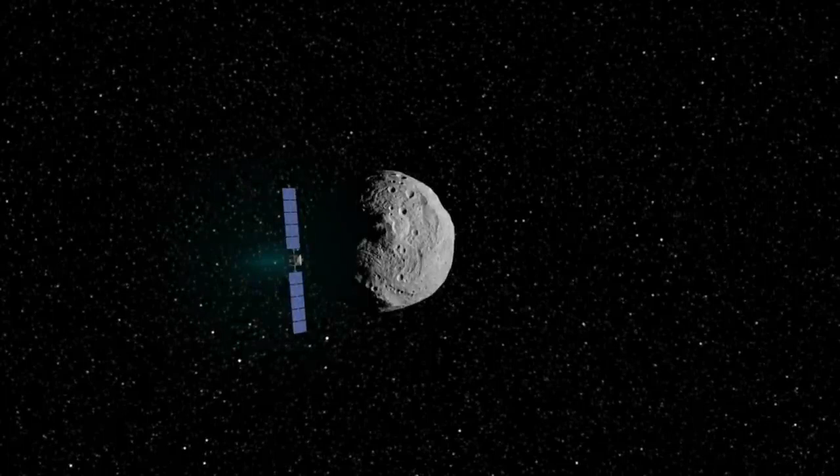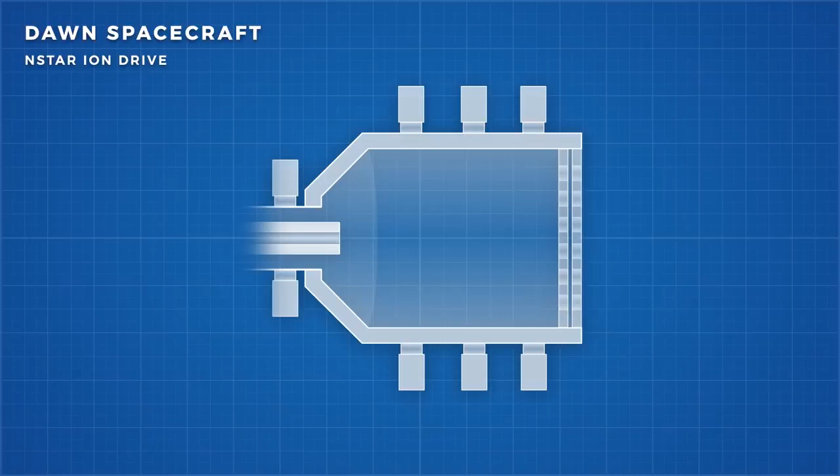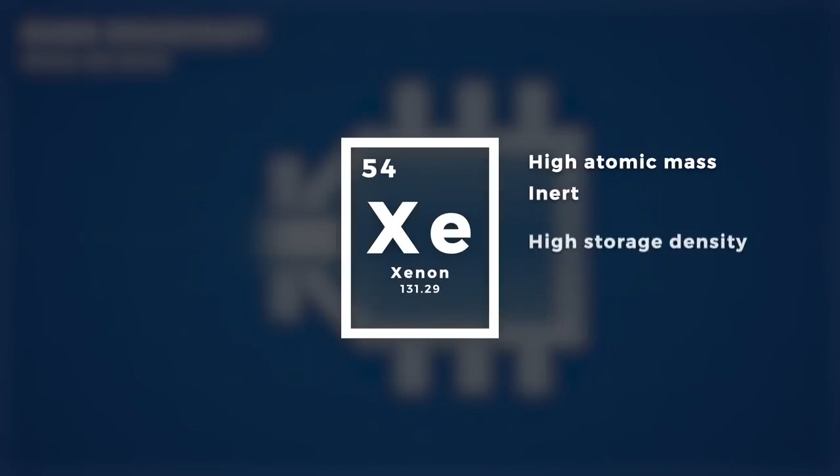This technology has been in development for decades now, with many spacecraft already using variations on the idea to achieve highly efficient thrust systems. These engines work on a similar principle to the ion propulsion of the MIT plane, albeit in a very different environment that lends itself to the technology. Take the NSTAR ion drive aboard the now retired Dawn spacecraft. This spacecraft used xenon as a propellant because it has a high atomic mass, allowing it to provide more kick per atom, while being inert and having a high storage density, lending itself to long-term storage on a spacecraft.

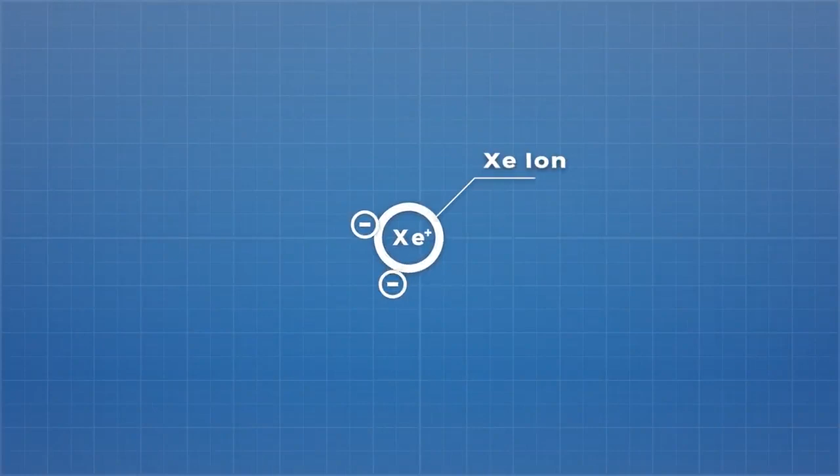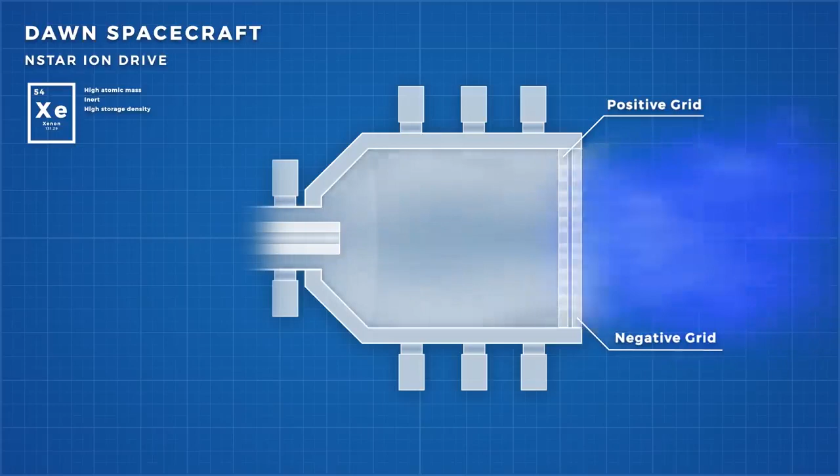The engine releases both xenon atoms and high-energy electrons into the ionization chamber, where they collide to produce a positive xenon atom and more electrons. These electrons are then collected by the positively charged chamber walls, while the positive xenon atoms migrate towards the chamber exit, which contains two grids, a positive grid called the screen grid and a negative grid called the accelerator grid. The high electrical potential between these grids causes the positive ions to accelerate and shoot out of the engine at speeds of up to 145,000 kilometers per hour.

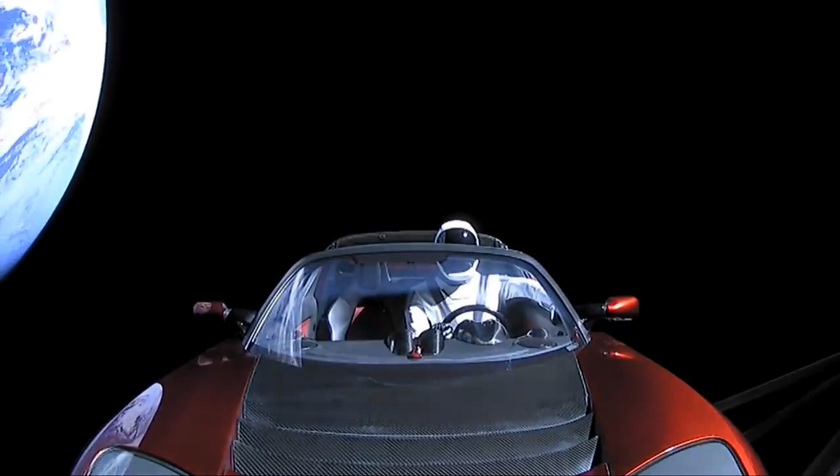At that speed, even the tiny xenon atoms can provide a decent bit of thrust, but even still, this engine provides a maximum of 92 millinewtons of force, about the same force a piece of paper will exert while resting on your hand. But in the vacuum of space, there is no air to sap away the precious energy we provide. With no drag or friction to remove energy, we gradually build our kinetic energy and gain speed.

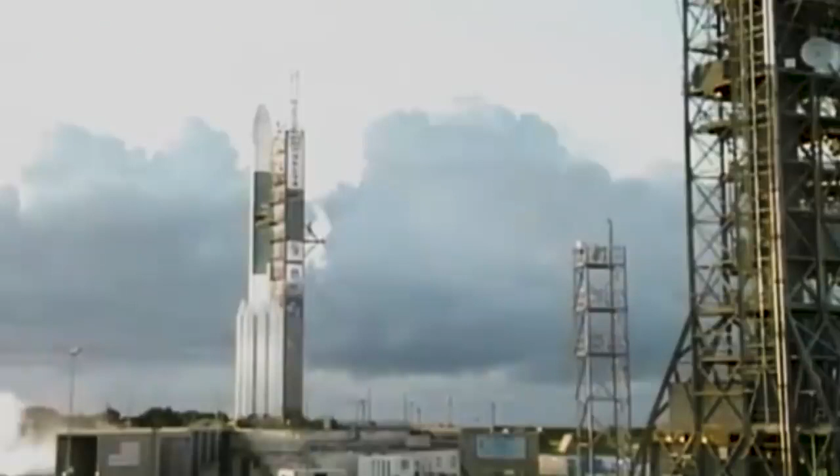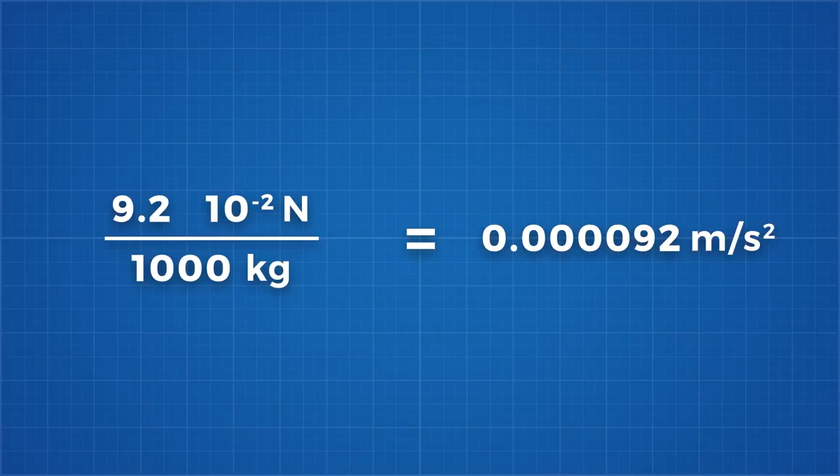The Dawn spacecraft weighed about 1,220 kilograms at launch, with a dry mass of 750 kilograms after the propellant had been expended. So let's say it has an average weight between the two of 1,000 kilograms. Rearranging the force equals mass by acceleration equation, we can calculate the acceleration this engine could provide at 0.000092 meters per second squared. A tiny acceleration, but multiplied by a week, and our spacecraft is flying at 55.6 meters per second. Multiplied by a year, and it's flying at 2,898 meters per second.

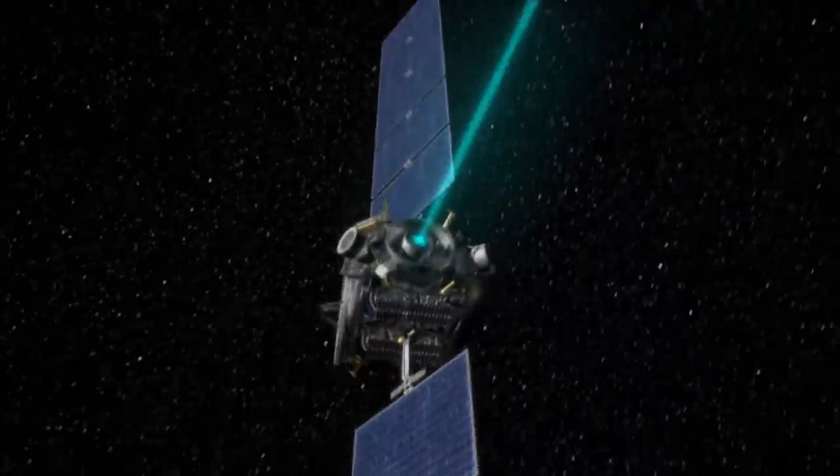That's 8.5 Mach. The latest generation ion drives, dubbed the NEXT engine, can produce 3 times the force and have been tested continuously without stopping for 6 years straight here on Earth. That's enough force to accelerate that 1,000 kilograms to 44,651 meters per second, 130 times the speed of sound. This is an incredible technology that will revolutionize how we explore space in the near future, but here on Earth it has a completely different set of challenges.

Here on Earth, planes pose a completely different challenge. Air will continuously sap away any energy we input into our vehicle through drag, and so we need to create an ion drive that can provide more energy than air can remove while traveling fast enough to achieve flight. Not an easy task, and the fact MIT have managed it is mind-blowing. Let's see how they did it.

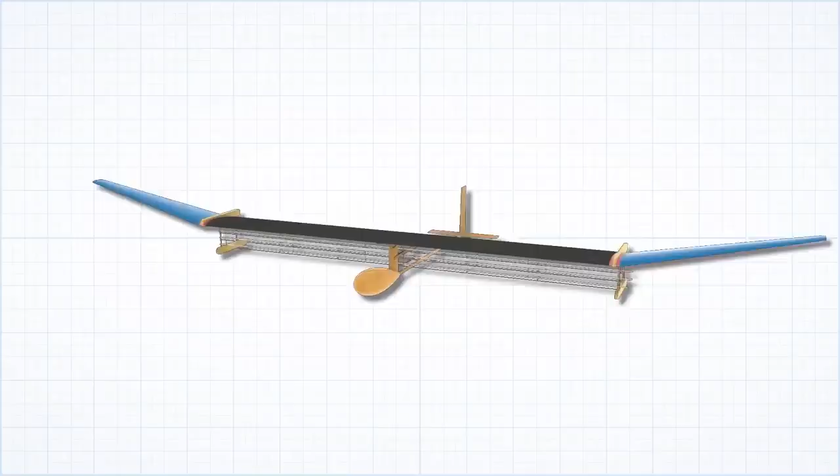They first needed to optimize their plane design for the application, reducing weight to minimize the energy required to maintain height, and minimizing drag to reduce any energy losses to the air. They did this using something called geometric programming optimization, which allows designers to specify constraints and design criteria to a program, which will then find the optimal design.

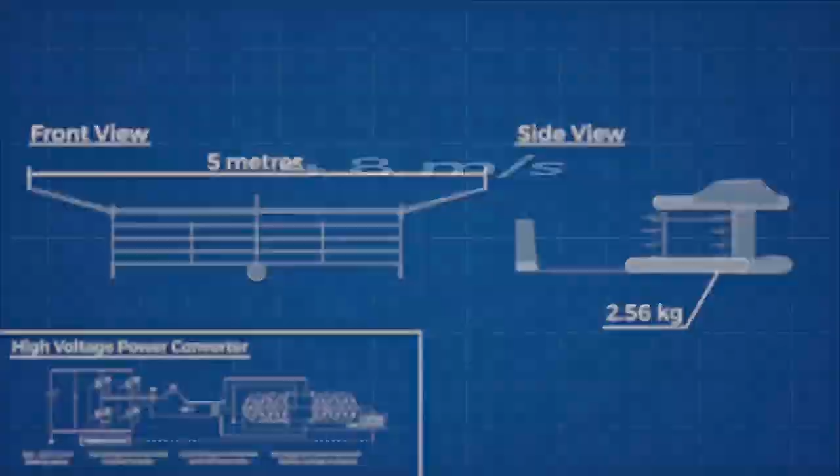After running multiple computer simulations, they settled on a plane with a 5-meter wingspan and a weight of 2.56 kilograms. It would require a flight speed of 4.8 meters per second with a thrust of 3.2 newtons. 3.2 newtons is vastly more than anything achieved by the NSTAR or NEXT engines, but they don't work in entirely the same way.

Ion drives for space need to carry atoms to be bombarded. Within Earth's atmosphere, there is no shortage of atoms to ionize and accelerate, and this helps counteract some of the negatives of the drag they also induce. The plane's propulsion comes from an array of ion drives carried below the wing.

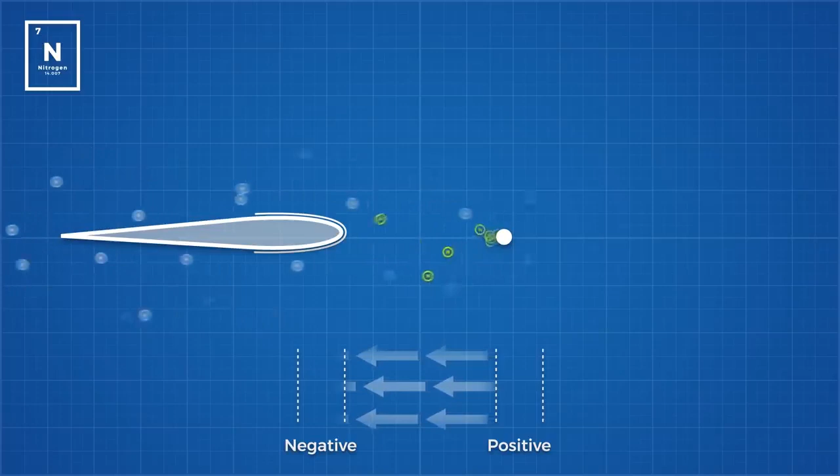The positive anode was a thin steel wire, which helped minimize the drag it induced, while the cathodes were foam aerofoils covered in thin aluminium, these being light and capable of producing lift to offset their weight. In this case, nitrogen is ionized and attracted across the electric field, induced by the 20,000 volts of electric potential between them. The nitrogen ions collide with neutral air molecules along the way to provide additional thrust, creating something called ionic wind.

Getting that 20,000 volts of direct current is really the most difficult part, and the team had to design their own lightweight, high-power voltage converter to step up the 200 volts of direct current drawn from the lithium polymer batteries. This energy storage conundrum, as explained in my electric planes video, is the biggest challenge facing any technology like this. So how does this compare to conventional propulsion methods regarding thrust-to-power ratios?

A typical jet engine achieves a thrust-to-power ratio of 3 newtons per kilowatt, while helicopter rotors achieve a thrust-to-power ratio of about 50 newtons per kilowatt. This ion-propelled plane is estimated to have achieved a thrust-to-power ratio of 6.25 newtons per kilowatt. So if we could find a way of powering these devices that didn't require heavy batteries, could these ion propulsion engines be used?

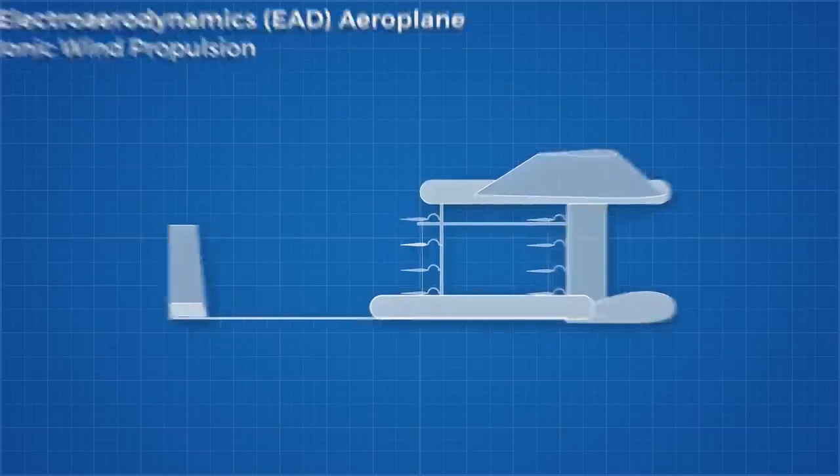Scaling these propulsion methods is not easy, and individual electrode pairs have their limit in the current they can pass between them via ion transport, due to limits in voltage and choked flow within the electric field, just as air can become choked within a constricted pipe. This affects something called the thrust density, which is the area over which the thrust is applied. Jet engines have a very high thrust density at over 10,000 newtons per meter squared, so we can produce a great amount of force with relatively low area.

Now, this plane achieved a thrust density of 3 newtons per meter squared, so it is generating very little force over a very large area. We can just about manage to provide enough force with 4 racks and 2 rows of these electrodes hanging far below the wing for a plane this light and slow. The issue here is the same issue that prevents batteries from being a viable solution for planes. Power requirements do not scale linearly with the mass of the plane, they increase with the square of the mass, while the power requirements to overcome drag increase with the cube of the velocity.

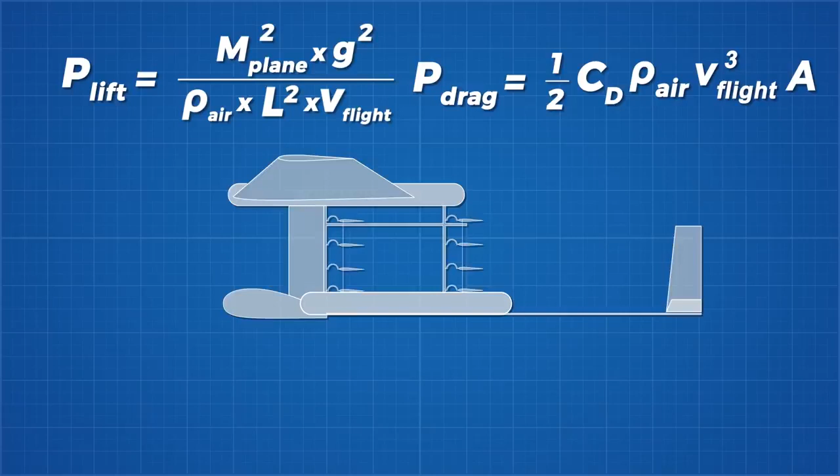So our ion propulsion power will need to scale with it, but we cannot simply hang racks and racks of these electrodes beneath our plane. They, along with the structures required to support them, would cause far too much drag, and in turn flight surfaces would need to scale to counteract the pitching moment this would cause, causing even more drag.

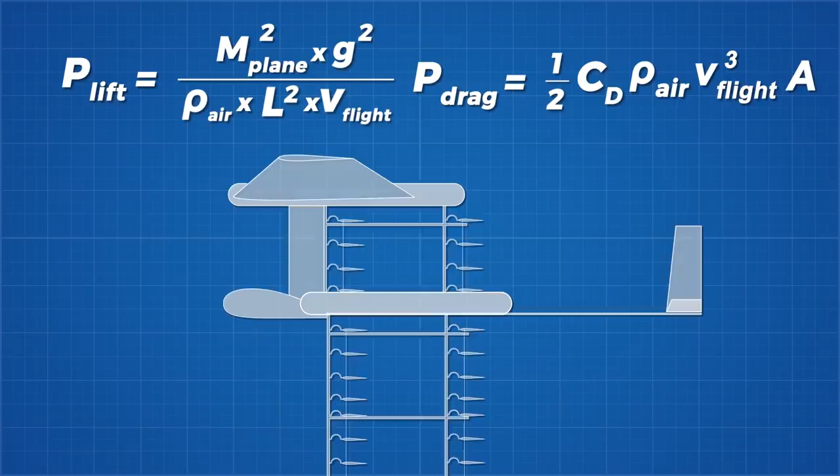This technology is still in its infancy, and there are engineers far more intelligent than I working to figure out ways to apply it. Just think that 114 years ago, the Wright Flyer managed to fly just 35 meters in its 12-second first flight. This ion-propelled plane managed 55 meters in 12 seconds, and who knows where we will be in 100 years' time. We, as a species, are continually growing and learning how to apply these principles. It's a fundamental part of the human experience to continuously develop your skill set.